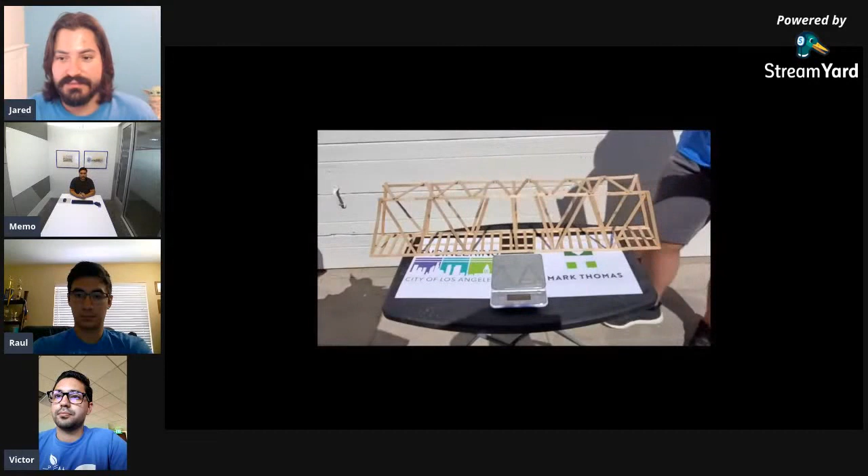Totally. Yeah, I mean, like Jared said, we're just checking that no Krazy Glue was used, that no Gorilla Glue was used, and we're checking that there's common craft wooden sticks. All the bridges are standard common craft wooden sticks.

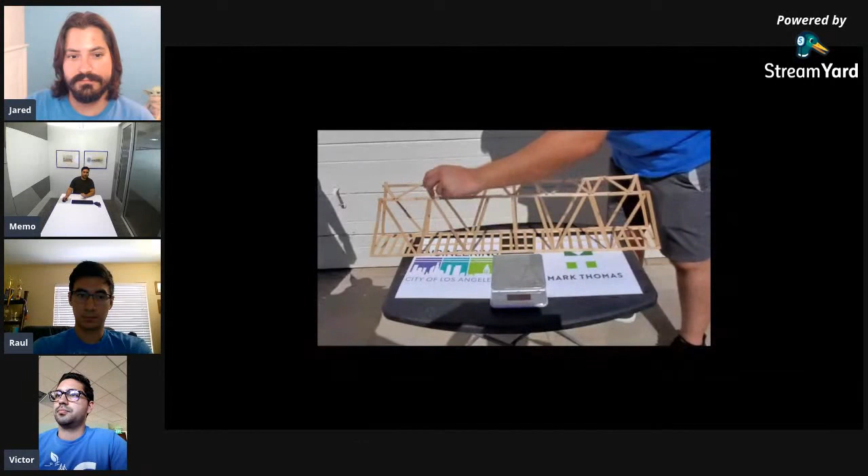Now we're going to check the 50% rule, verifying that no flat plane overlaps another flat plane of a stick by more than 50%. Bridge is in compliance. Now we're going to check that none of the popsicle sticks were altered or modified, with the exception of the roadway sticks.

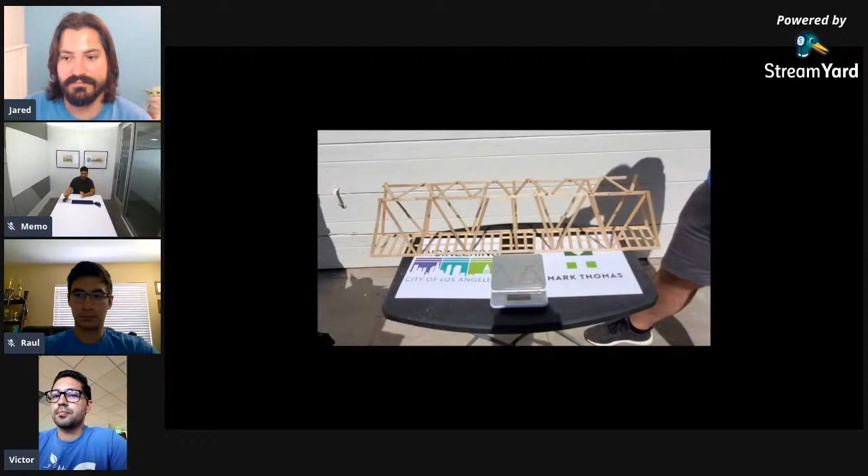And this bridge has no altered or modified sticks. Now we're going to check the bridge length. It's 37 inches. All right, got it.

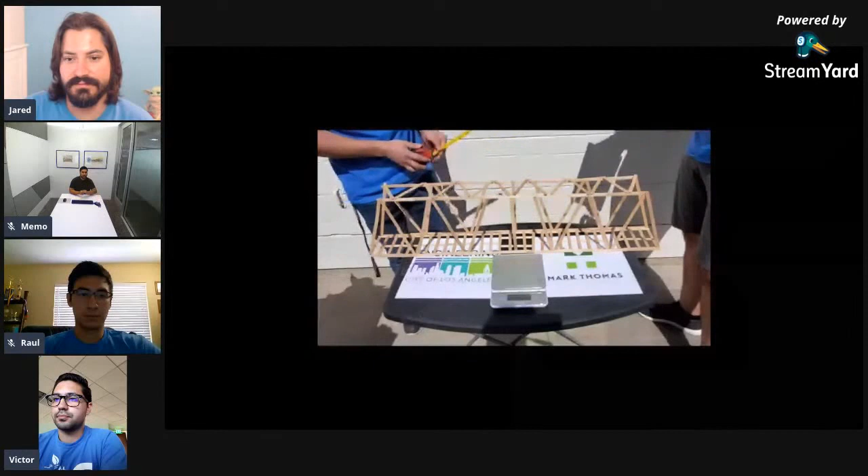Now we're checking bridge height. Why don't you turn the stick towards the camera? Can you guys read that? That is 9 inches. Now we're checking bridge width. 4 inches.

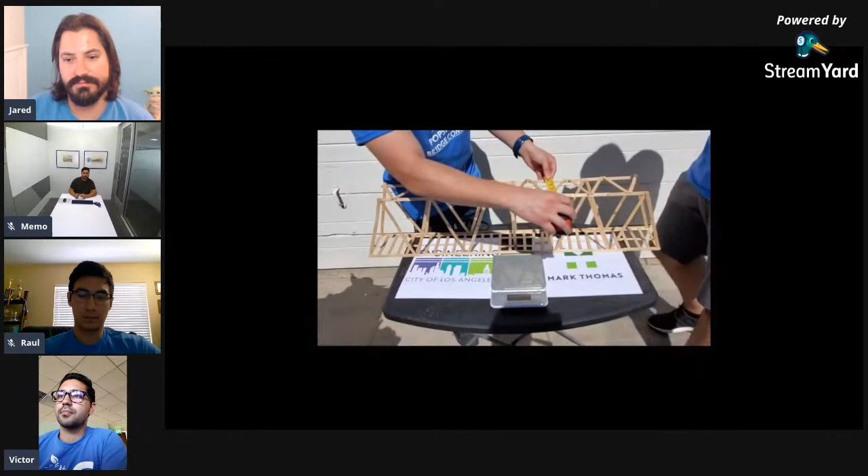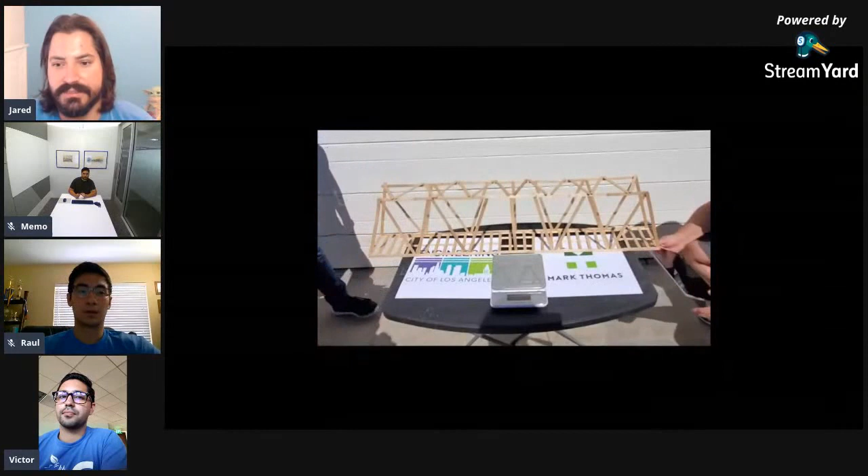Next step, to check if the roadway is continuous, flat, and level. So the bridge we're watching here, this is team prototype, right? Next, bridge number 1, the bridge roadway width is 4 inches in clearance, minimum 4 inches. Yes, what's the width? Looks like everything's in compliance so far as the dimensions.

Now the bridge roadway minimum height clearance, minimum 4 inches. Bridge is obviously more than 4 inches.

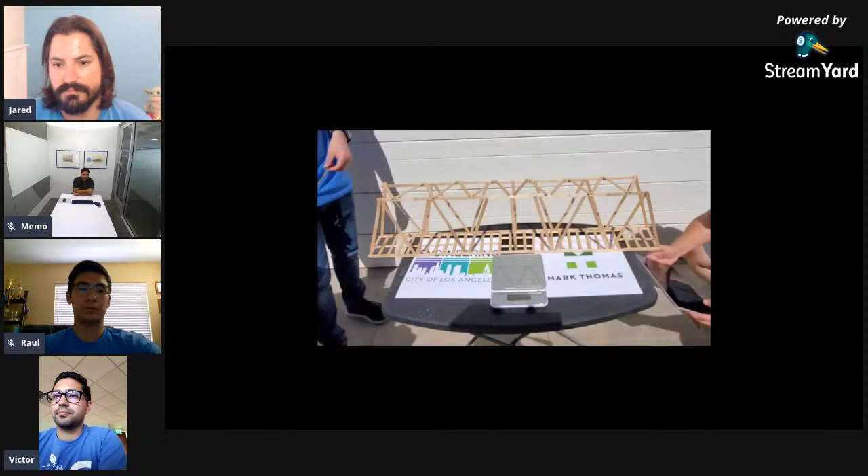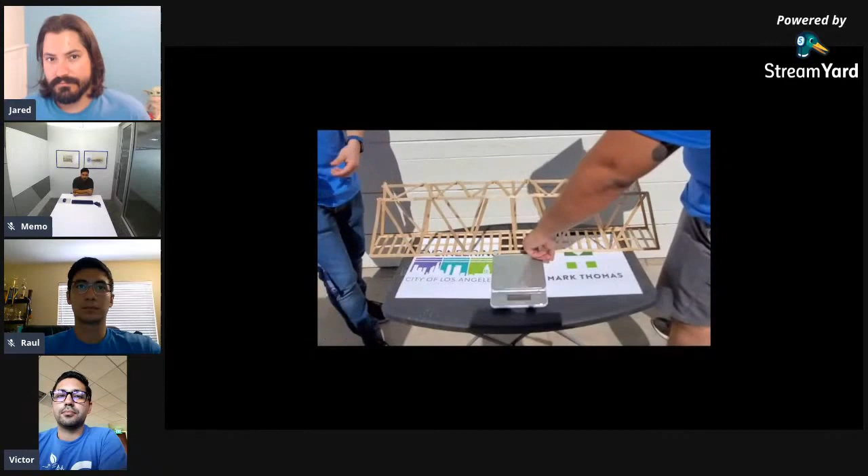Okay, now the last step is to check the roadway clearance. Check that this opening is 1.5 inches by 1.5 inches minimum. From this stick to this stick, 2 inches? Yeah, 2 inches. Okay.

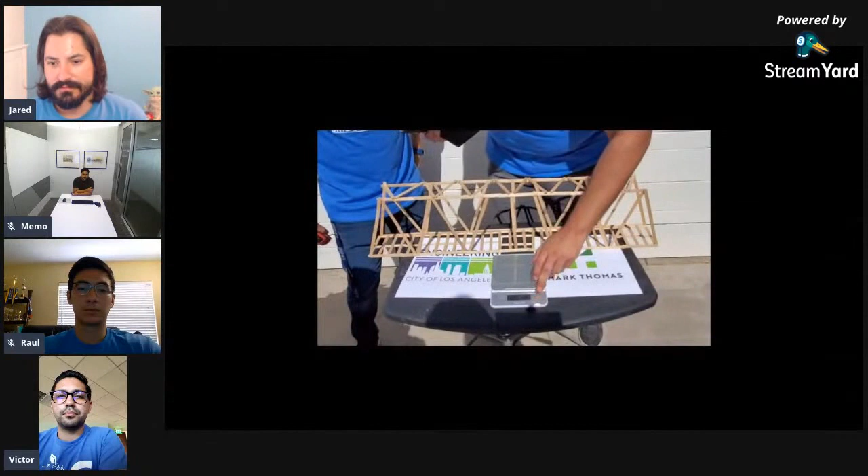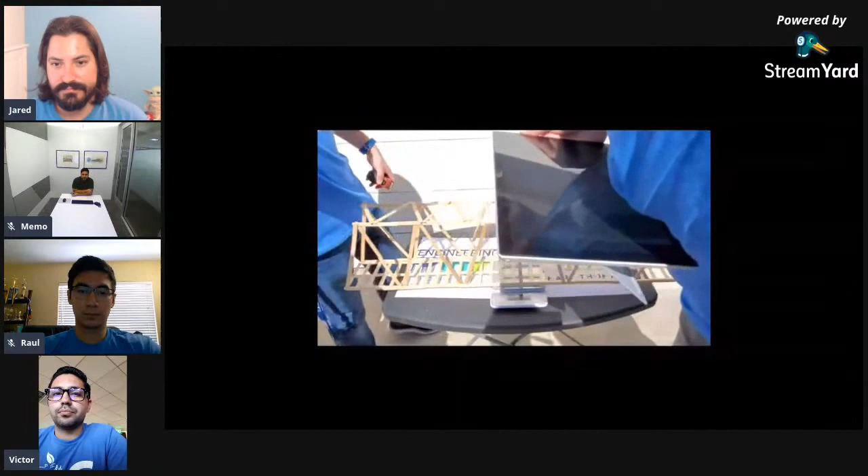Okay, and then weight. Oh, now we're weighing the bridge. Is it on? It's very hard to tell. Yeah, zero it up. Okay, we're weighing the bridges. This will be part of our efficiency calculation when we go to load the actual bridges.

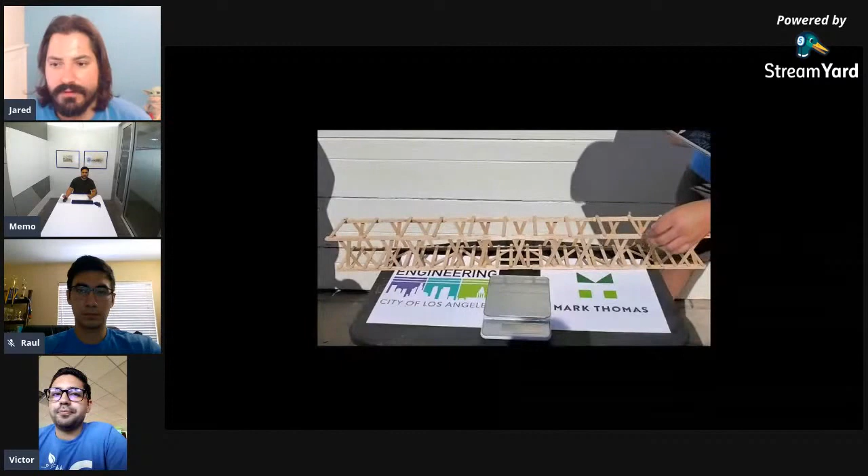This is bridge 202. First, we're going to check that the bridge is all white glue. This is the next bridge that we're testing for compliance. Team number 2, bridge is in compliance with, which I believe is glue. The next check is to verify the bridge is crafted from common wooden craft sticks. As we can see, the entire bridge is crafted from common wooden craft sticks.

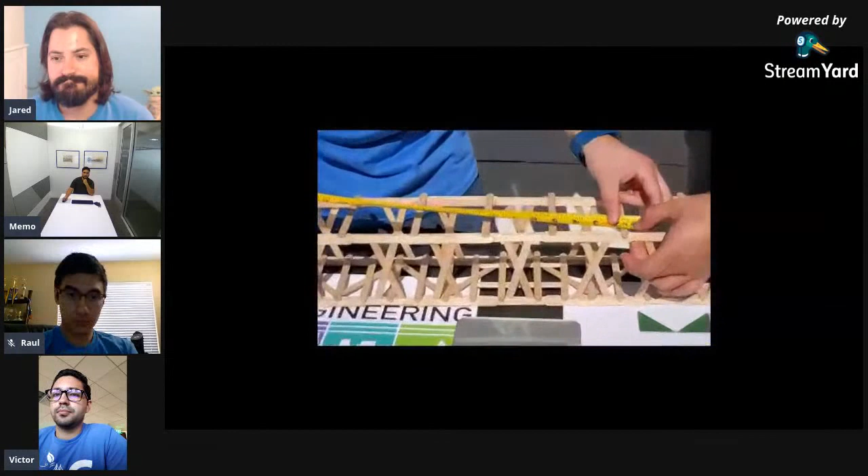Next step is to check the bridge's 50% rule. So now this is critical, this is our 50% rule. We have 1 inch of overlap, we have a quarter inch of overlap, we have another quarter inch of overlap, and we have 1 inch of overlap. But these are on different faces, so they only count towards one side of the popsicle stick. So these bridges are sharing 2.25 inches of face overlap, therefore not violating the greater than 50% rule.

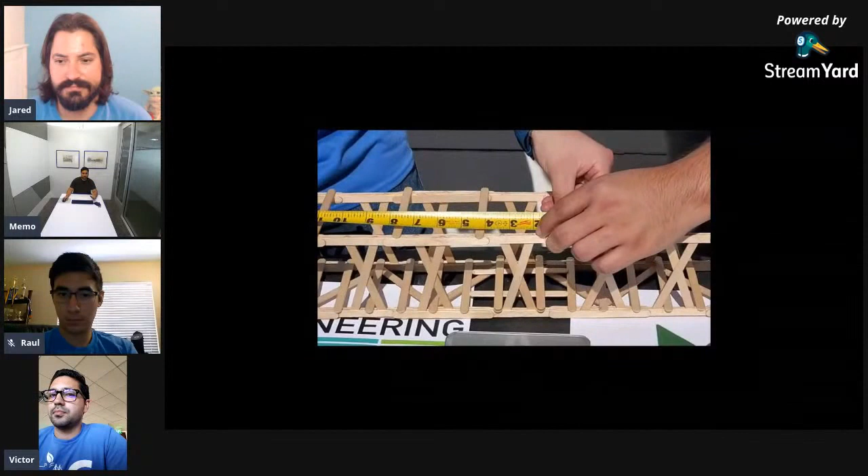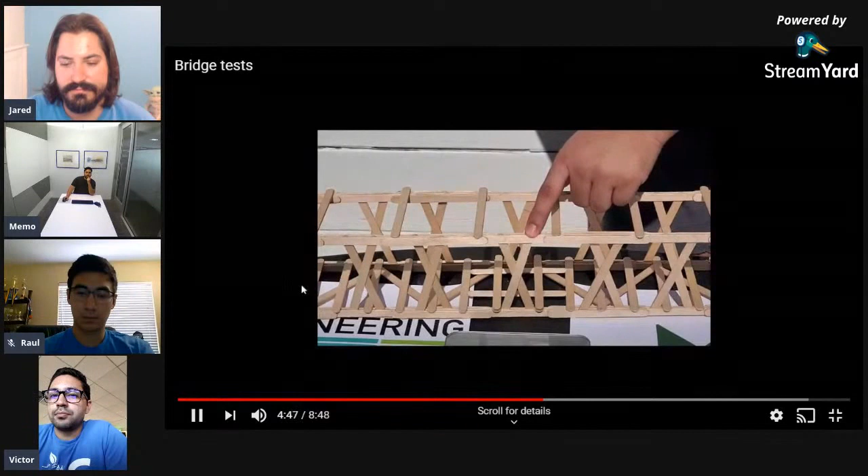Now we're shifting over to these. So there's 1 inch, there's a quarter inch, there's another quarter inch, there's an inch. So in the case of these, since it's on the same face, these bridges have 2.5 inches of face overlap. Therefore, it is in violation of the 50% rule, so the bridge will be docked for that. Okay, yeah, so I just wanted to go ahead and pause at that moment.

So you could tell that this team took a lot of time to really ensure that they didn't violate that 50% overlap rule, which is basically, let's see if I can, I've got their bridge right here, is when you have a popsicle stick, one of the faces of each popsicle stick is about 4.5 inches long.

And you can't have more than 2 1/4 of that popsicle stick covered basically by another popsicle stick. That's our 50% rule. So on the first part, the first gap where they've got those cross members on their truss, we explained that they measured it just enough so that they didn't violate that 50% rule. But then when you go to the next opening of their cross members on the truss, they have both cross members on the same horizontal face, which essentially gives you about, I think, 3/8 for each popsicle stick. And then at the ends, it's held together and held horizontal by another inch overlap on each side. So that actually puts them over the 50% rule. So it's like every other space on their truss system violates it.

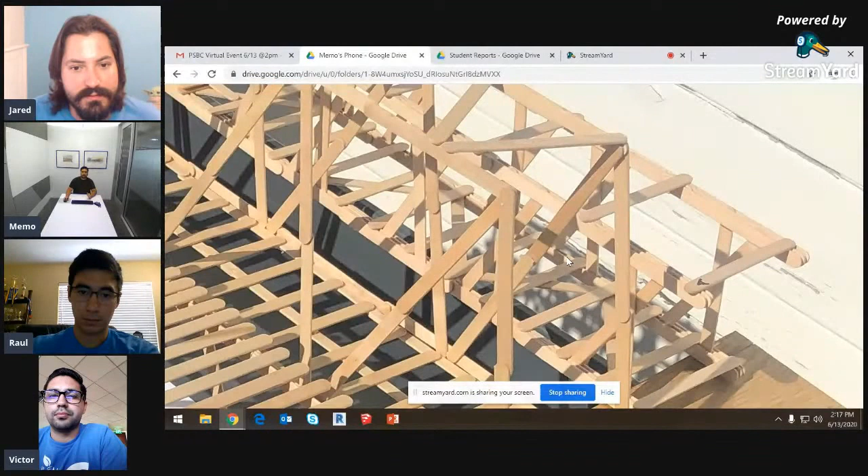Oh yeah, let me share that for you. Okay. We see your screen, Memo. Okay, so what Jared's saying is right. These segments that repeat every other segment, these are fine, right?

And one of the reasons you'll see in the loading, one of the reasons this bridge did so well is because it is so robust and so beefed up, right? It's an amazing thing what these students did. It is unfortunate about the 50% rule, right? But overall, we still did good.

So in these pieces where this bridge, this popsicle, and this popsicle are touching at the X, they're sharing different faces, right? It's on the inside of the stick and the outside of the stick. So that's fine, right? The issue is over here in this one. This, if you could see, kind of this is the most I can zoom in. Yeah, they're sandwiched in between, right?

Right. So each of these sticks is covered for more than 50% of it, right? Because the stick is 4.5 inches. We have an inch back here to connect to the next piece. We have an inch back here to connect to this piece. That's 2 inches already, right? And then it would have been fine if it was just one face of the 3/8 width. But since we have these two faces, that's what gets us over that 50% rule.

With engineering, you work really hard to push your design to the limit, right? And that's why it's so important, like in the work we do, right? We want to make sure our designs are efficient, just like how this bridge, you'll see when we load it, it's extremely efficient. And then the part that happened here, it could have been a little bit of oversight. Maybe the rule was misunderstood a little bit. Maybe we could have done a better job of explaining it.

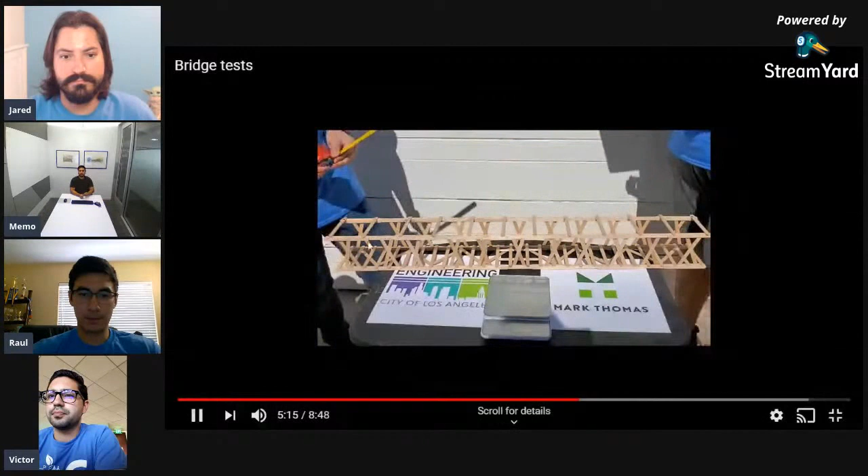Next is to check the bridge length, which must be between a minimum of 33 inches and a maximum of 43 inches. It's 38.5 inches. Next, we're checking the bridge height, which has a maximum of 12 inches. Bridge height is 4 1/4 inches.

Now we're checking bridge width, maximum of 8 inches at the top. Bridge width is 4 inches.

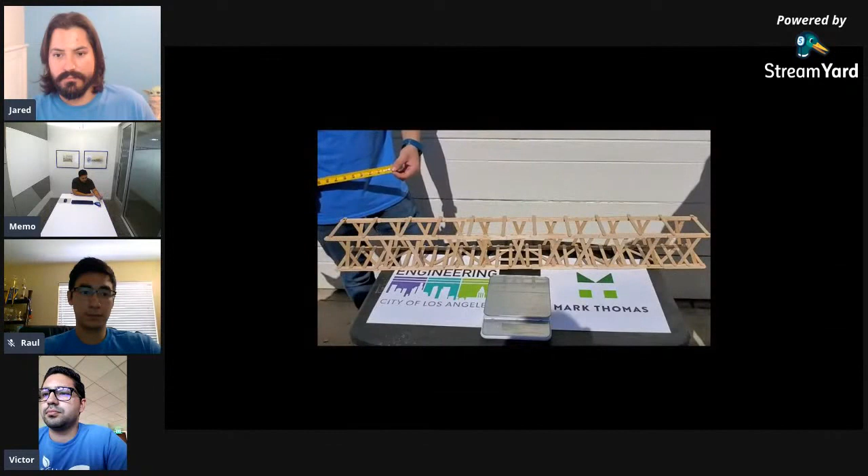Now we have to check if the road is continuous, flat, and level. In the case of this bridge, most of the deck is continuous, flat, and level. As you can see in this middle section, where we're going to do the loading, the sticks have a second layer which violates the level rule, so there will be a deduction for that violation.

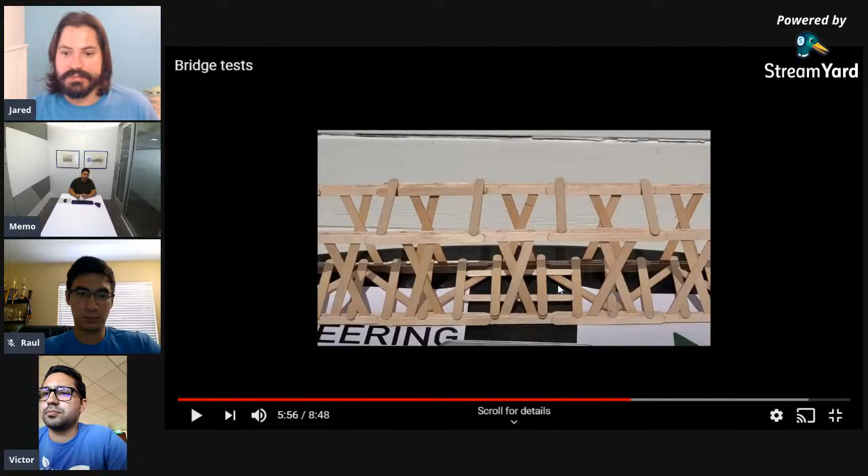So there was another minor deduction here, as Memo just pointed out, where there would need to be something flat and continuous. It looks like they've got some stacked up over the middle, which gave it not really a flat profile as you look down the bridge. So that would have been one smaller violation.

Next, we're going to check that the bridge roadway minimum width is 4 inches. Okay, they're doing the 4 inch width.

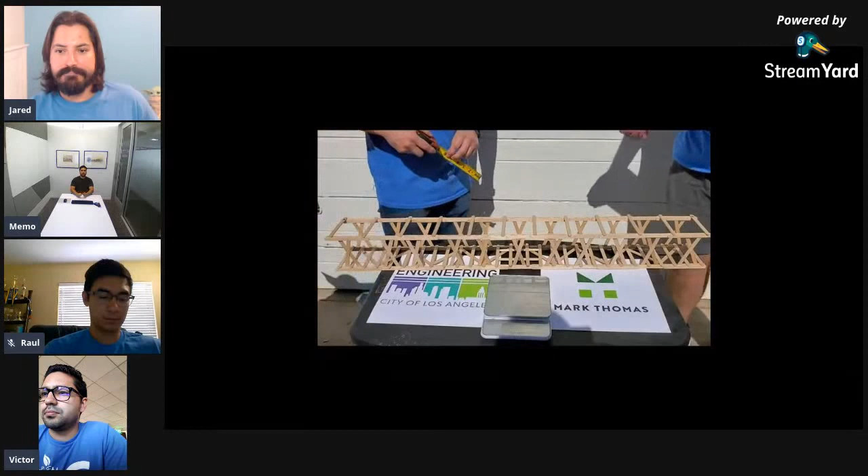Next, we're going to check the bridge minimum height clearance. Roadway height clearance is 4 inches. Now the roadway height clearance check — we're at 4 inches. Now we're going to check the clearance of the roadway opening.

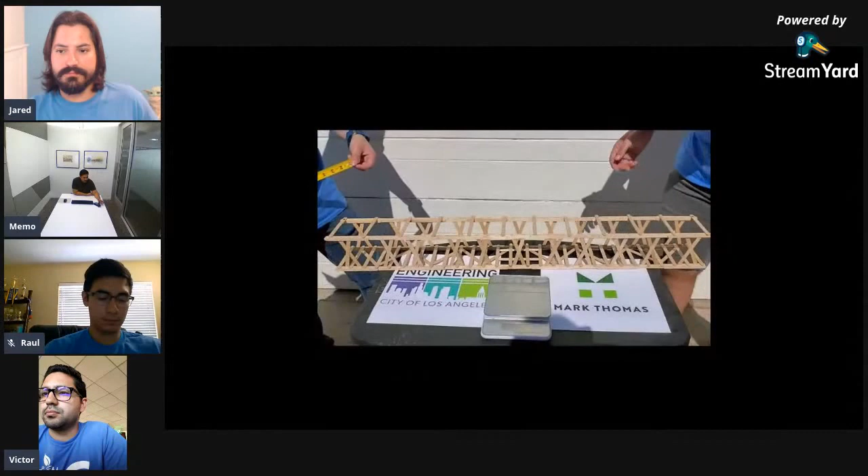It's 1.5 inches. Next is to check the bridge's weight. Looks like all the other dimensions were good to go. Bridge weight is 271 grams. That concludes the inspection of this bridge.

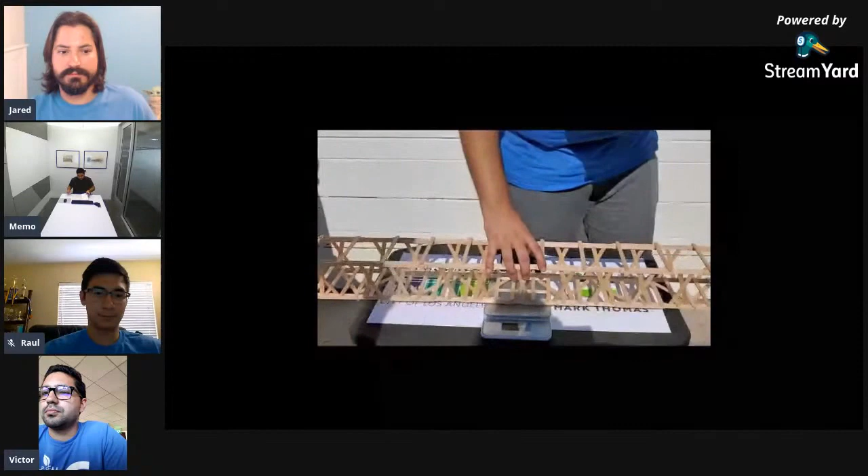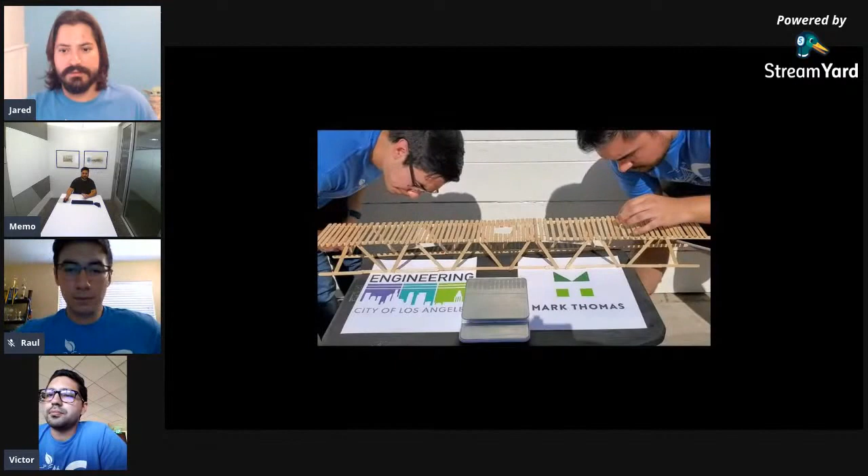Next up is bridge 203. First, we will check if the bridge is in compliance with the white all-purpose glue. Okay, this is our third bridge. We're almost to the fun part, everybody. Yeah, we're getting there — hey, bear with us. Bridge is in compliance with the white glue. This is Team Golden Gate.

Next is to check that the bridge is crafted from common wooden craft sticks. As we can see, the entire bridge is crafted from the same common wooden craft stick. Next, we're checking the bridge's 50% rule. In the case of this bridge, none of the sticks violate the 50% rule. Next is to check if none of the sticks were altered or modified, with the exception of the roadway. None of the sticks have been altered or modified.

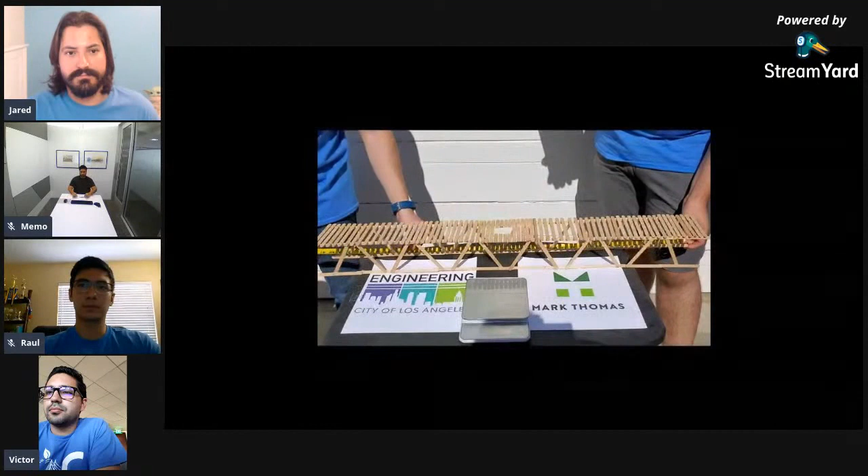Next, we can check the bridge's length, minimum of 33, maximum of 43. 40 inches — bridge length is 40 inches. Next is to check the bridge's height, maximum of 12 inches. Bridge height is 4 1/4 inches. Next is to check the bridge's width, maximum of 8 inches.

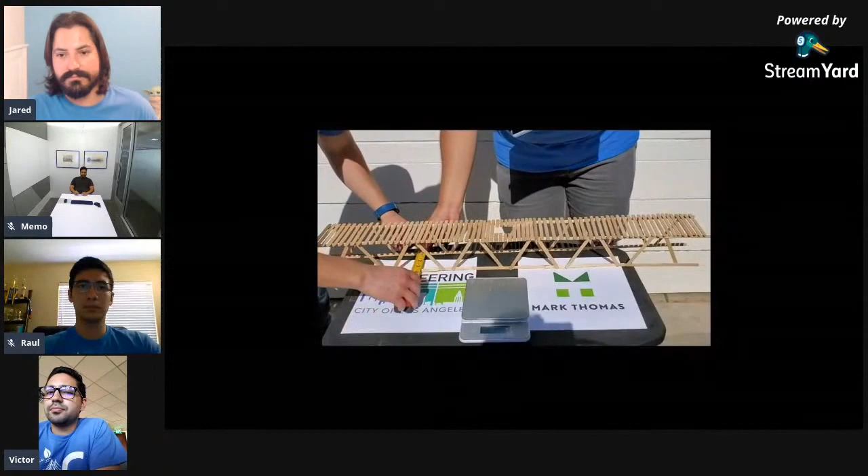Bridge width is 3¼ inches. Next is to check that the roadway is continuous, flat, and level. As we can see, continuous, flat, and level.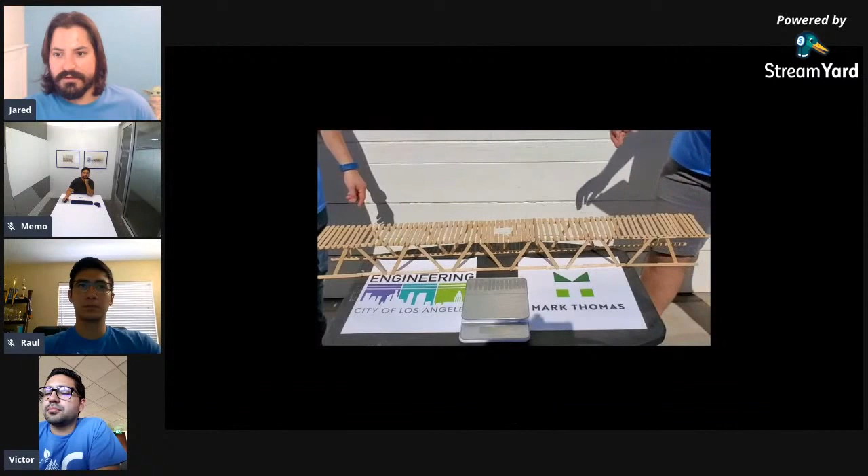Next is to check the bridge's roadway minimum width clearance of 4 inches. Looks like all the dimensions worked out. There's a level roadway, so we're fine there. And the inch and a half opening for the loading.

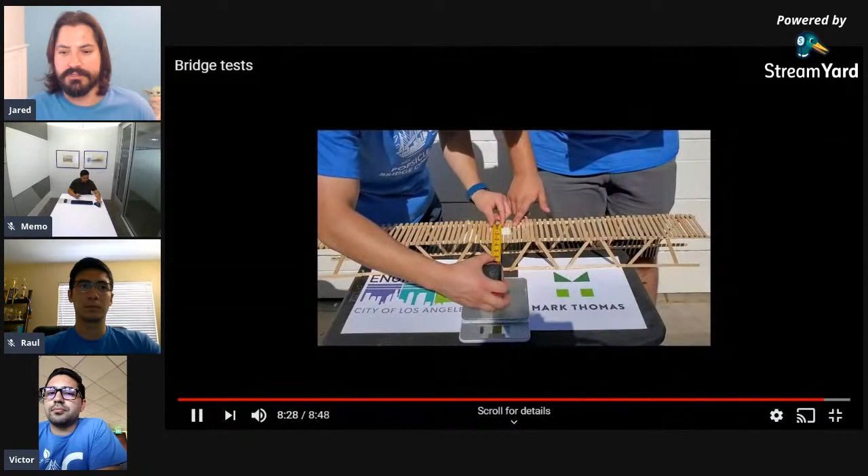Height clearance - in this case it's a deck bridge, so we don't have a height clearance, so we're fine. There's no loading height clearance since the roadway deck is on top of the bridge, on top of the structure. 1.5 by 2, so that works.

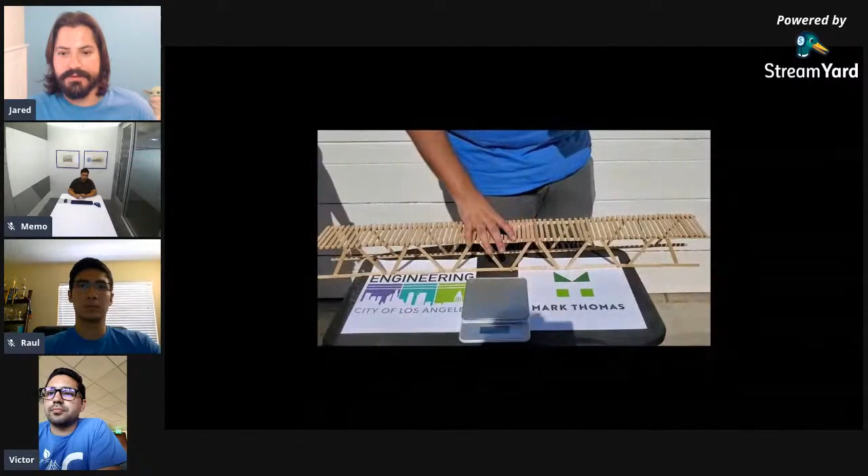Next, we're going to check the bridge's weight. Bridge weight is 171 grams.

That concludes the inspection of this bridge. Okay, great work, everybody. So we got the initial requirements out of the way. Yeah, these 3 bridges are so efficient and light that we had to go get a gram scale because our pound scale was not registering it. Good job on the efficiency of the bridge. So very efficient on your use of materials, everybody. Very, very efficient. That'll help out on that efficiency calc.

Did anyone have any questions so far? We'll keep an eye on the comment feed if anybody does. Let's go ahead and go to the actual exciting bridge breaking part of it.

Okay, everybody see that video? Yes. All right, let's go for it.

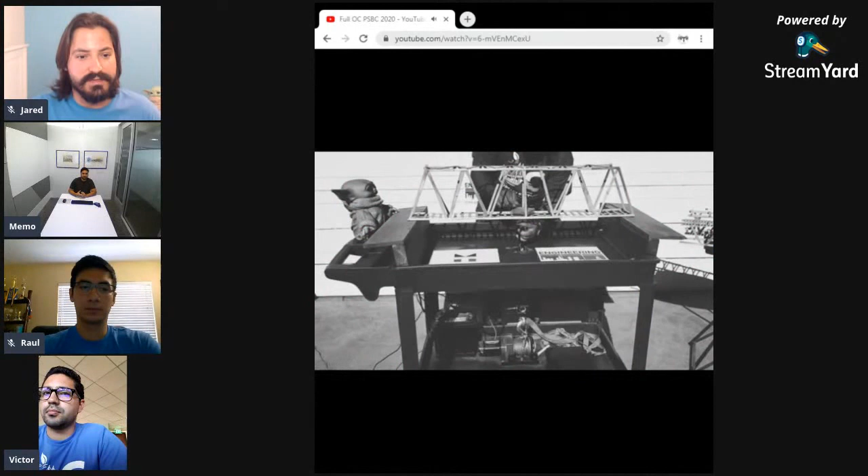So we have a force machine that we'll talk about at the end of the presentation, and Baby Yoda there was really supplemental to making the force work for this machine. So he's a cameo there that you'll see throughout.

Yeah, our force machine was pretty innovative this year. It's the first time using it.

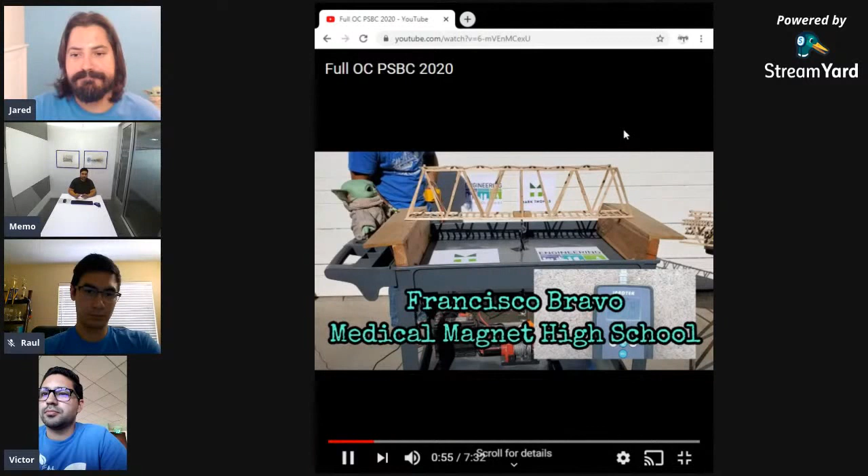All right, we've got our Francisco Bravo Medical Magnet High School. This is our first bridge. So we'll pause again - the little reader at the bottom, that's the force gauge telling us where we're at with the winch.

We use the winch at the bottom, a battery, and then the pulley system. So that winch or that force reader is going side by side with Jared and the loading device. So you'll see the numbers go up as the bridge gets loaded. The machine is smart enough to pick up the peak, right? The maximum force that was taken by the bridge before the bridge snapped, before the winch had zero force. So you'll be seeing the peak pound force reading for each of the bridges.

Yeah, good point, Memo. And that'll also help you kind of identify where its critical break was. Once it peaks out, you'll pretty much see where the entire bridge failed.

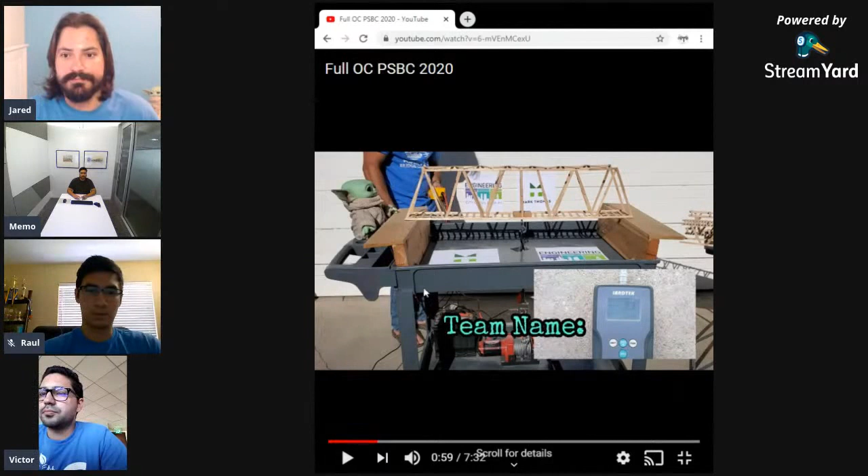Okay, so we've got the prototypes. And here's a list of their members. We got Carly, Elmer, Saray, and Simran. Sorry if I butcher any names out there. Apologize ahead of time.

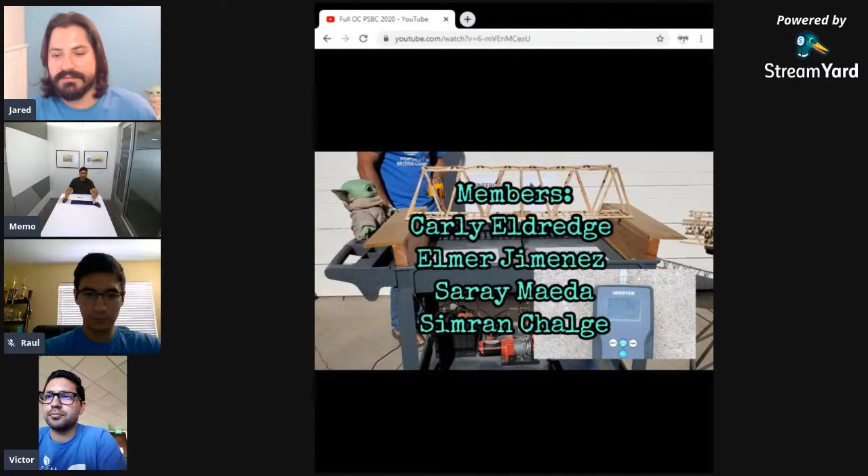And it's going to be quick. Should be reading, should be reading. Okay. And there you go. 13.9 pounds.

So for those familiar or not familiar, we'll take the weight that we grab, right? We got it in grams, we'll convert to pounds. And we're taking the efficiency and we're dividing, and we're going to get pretty much an efficiency calc. And that's essentially the entire calculation, right? It's just a quick division.

And we use pretty much, it's a scaled weight where the bridge that held that was most efficient becomes the baseline, right? So that becomes 100% of the score, and then from there on, the bridge that is less efficient will be a fraction or a scale of that weighted distribution. So that's just a little bit of the math that we used.

Awesome. All right, and so now what we're about to watch is that entire breaking process and loading process all over again, but we slowed it down. And we're just going to be able to see initially where those critical points are, where maybe something broke or let loose, or kind of that critical point and critical moment on the bridge. So let's go ahead and take a look and see what we can discover.

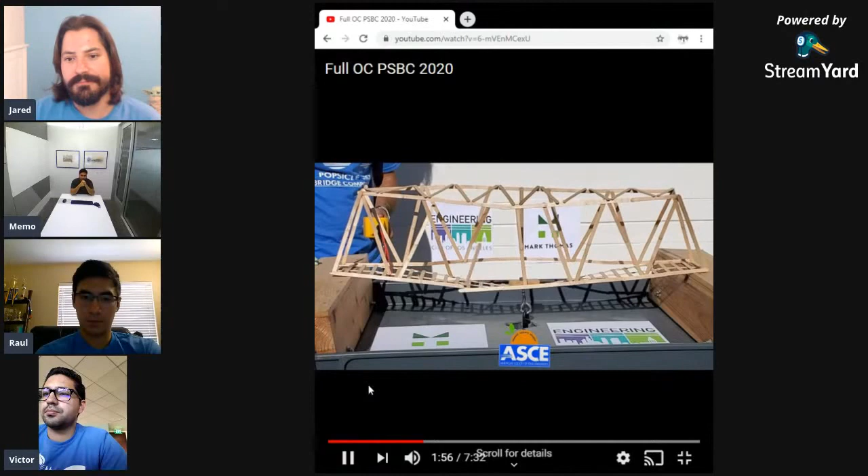All right, and right there you can see that the roadway has pretty much been exhausted on how flexible it can be. And now, since you have both of these truss systems no longer supported horizontally by this roadway, you're starting to see what looks like a twisting motion. And there goes the members.

All right, any thoughts or comments from any of the team members? Sorry about that. Or any other thoughts, guys, on this bridge?

You covered it, man. Yeah, we saw the snap like dead center at the top and in the middle, you know, it behaved the way physics tells us it's going to behave.

Yeah, I feel like this thing could have held a lot more if that separation didn't happen so early on. Yeah, something that could have been done to mitigate that is, as you can see in the center, there's just that one vertical joint which is essentially taking the whole load. The actual trusses themselves don't connect to that one vertical joint, so they don't assist as much as they could. If it was designed in a way where there were more than one member coming from that one point load. I feel like the trusses could have been engaged more efficiently, and the bridge would have ultimately held more weight.

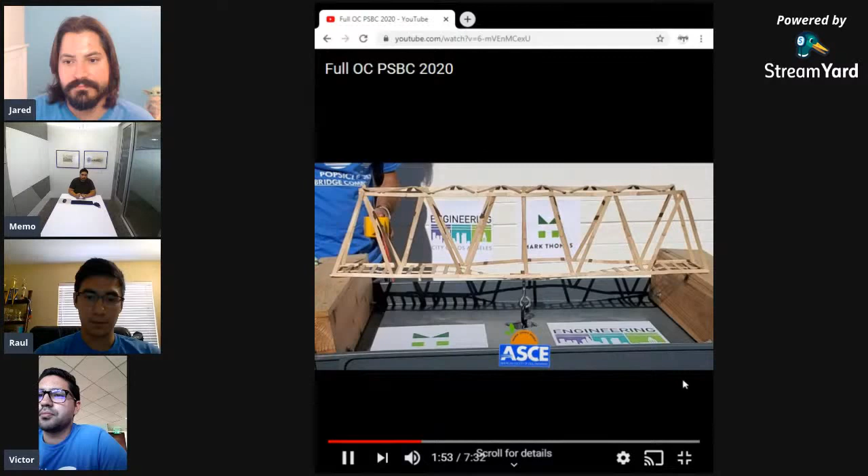That's a good point, Raul. Thanks, Raul. Okay. Great job, Team Prototype. Alrighty, moving on to the next one.

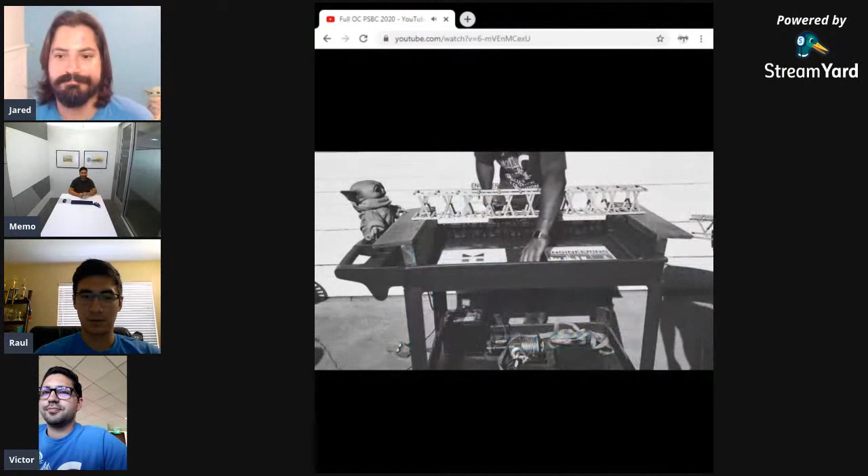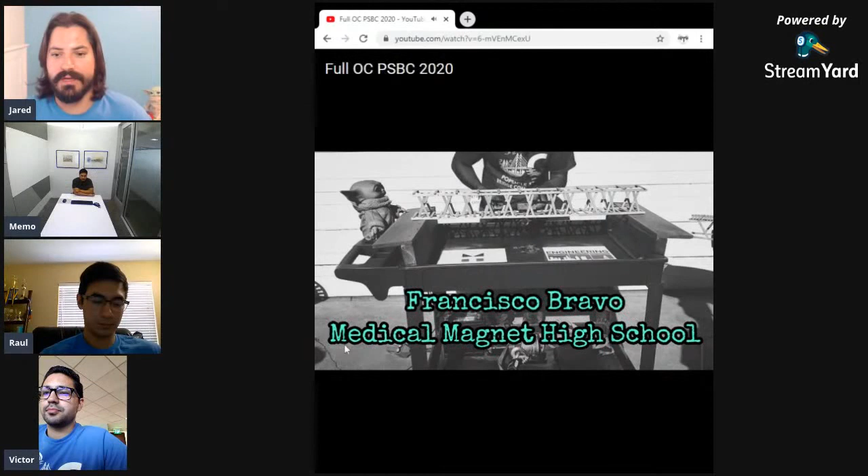Okay, we've got another Francisco Bravo Medical Magnet High School team coming up, Team Chevron. I thought this was an interesting name. And here we've got Christine, Kelly, and Michelle.

.5, 1, 1.1, 2.7, 3. Oh, we're getting that screen again. It's okay, it's okay. 7.7, 11.5, 15.1, 19.6, 26.7, 39, 45, 52.

Still going, right? It's snapping, but it hasn't broken. 75, 90. Oh man, 90 pounds, great job. 90 foot-pounds. You got to love that crackling sound of when it's just starting to fail.

That's great. Yeah, no, I mean this bridge was awesome. The stuff we were talking about earlier, it pays off here, right? You see the bridge took 90 pounds, and all the engineering that went into it. I think they did a great job, and yeah, good job.

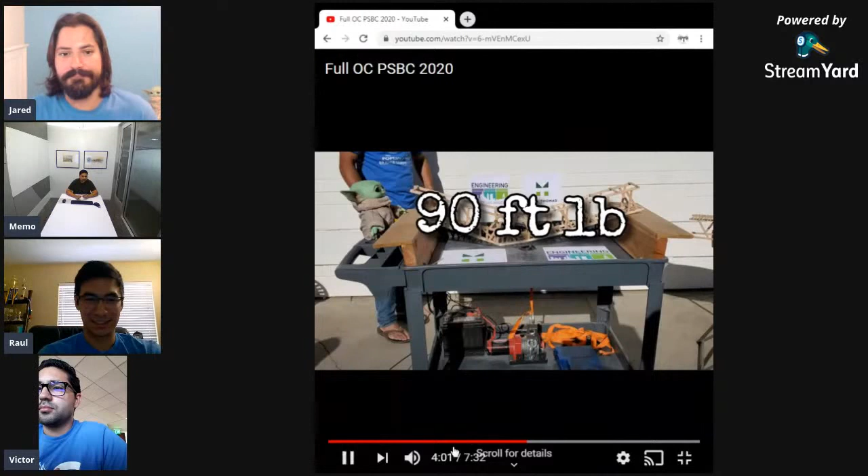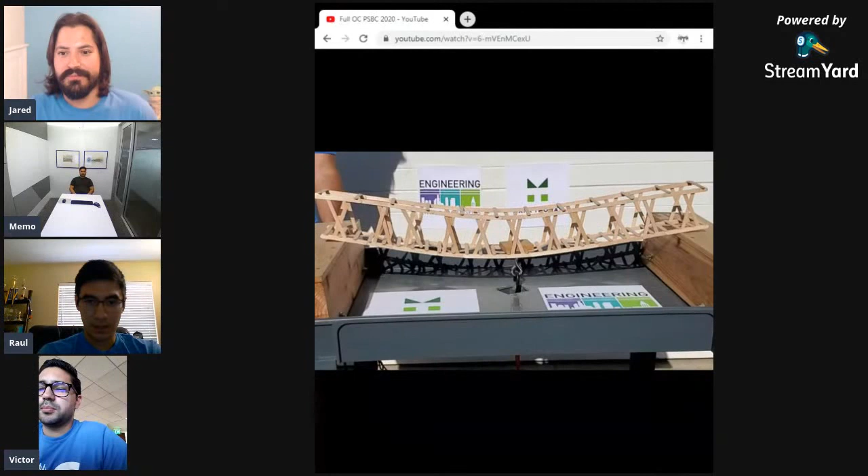Okay, slow-mo cam. It actually takes a while before it's deflecting, deforming, and twisting. But look how uniform of a fail that was. Really, it was doing these slow twists, but it just kept compensating and rocking itself back and forth until it just came straight down. One thing I noticed about the fail is it didn't happen at a joint.

It actually happened on the sticks, so that's pretty unique. You can tell by the way this bridge ultimately broke at the end that the weight was distributed across the whole span of the bridge, which was an intention that the team had. Good job on that.

One thing that was rare here is we rarely see bridges deflect this much before they snap. If you back it up just a bit there before it snapped, you'll see how much deflection we got out of it before it actually gave. Usually the connection is going to give before the deflection gives. But here we were able to get, even if you keep going, I think there was more. Yeah, like right there. That deflection right there, that just proves how awesome this bridge was.

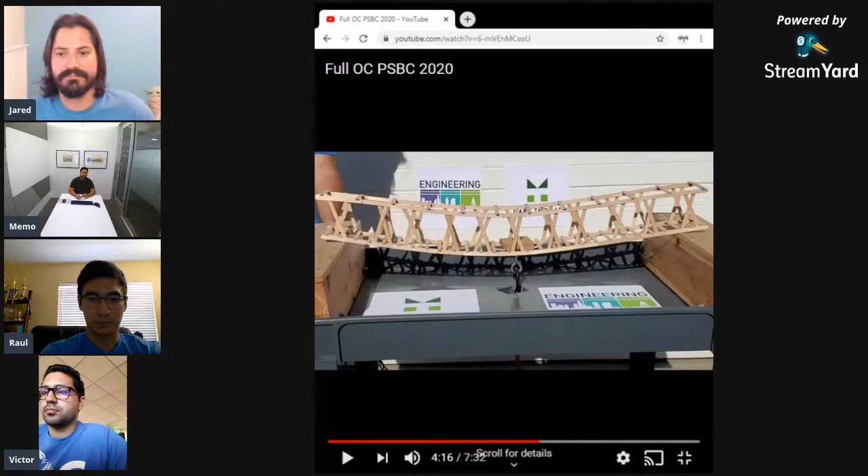Because bridges in real life aren't meant to be totally rigid. They're meant to have some ability to flex with either the heat or the load. If bridges were totally rigid, we'd have more failures. So this bridge kind of proves what you could do, the flexibility that bridges are allowed.

Of course, we knew we were loading it to the max load. But if we would have put 50 pounds, if somebody would have put a couple books on here, maybe you all tested it already, I think we read about that, this bridge would have performed just like it should have. We knew that our bridges were being loaded to the point of failure. But yeah, good job.

Great work. Let's watch this thing break one more time. Nice, there it is.

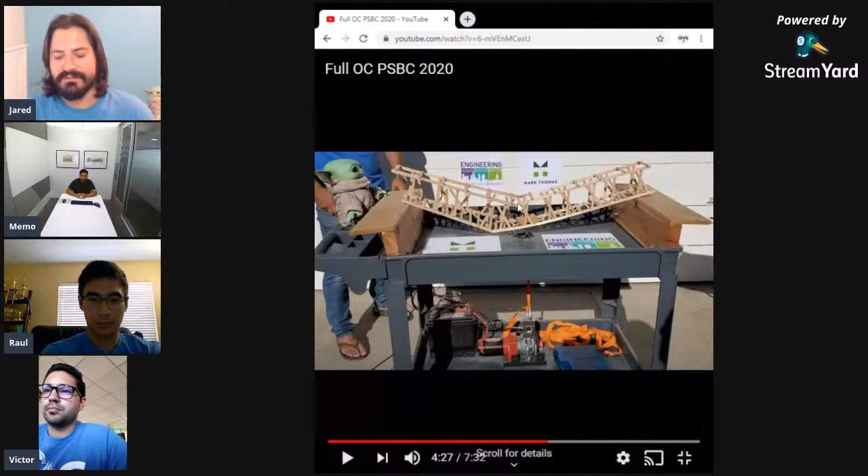You can see again how the winch is remotely being pulled down. I'm over here with an actual remote and a button that'll let me make it go up and down. And then there's a controller box you can't see back here, but it allows how much energy is going down to this winch. I have it on the lowest setting, so that's why you get that slow creaking movement. It's consistent for all the bridges so that they're all being pulled at the same rate.

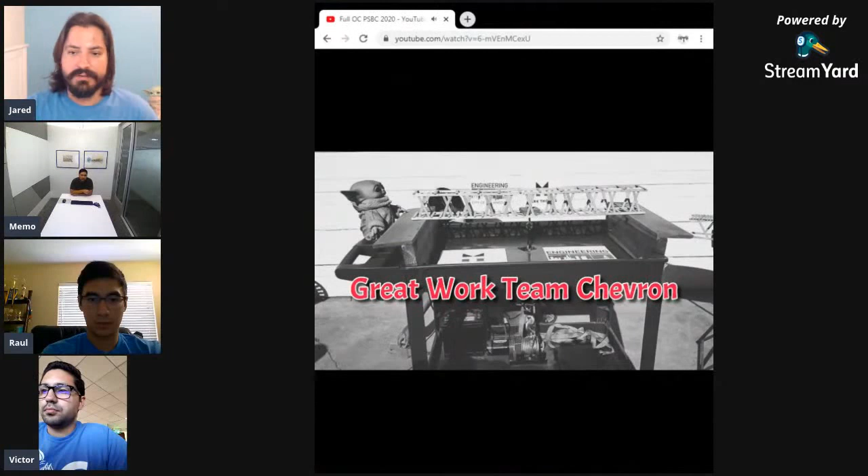We still have Yoda supervising. All right, let's do it again.

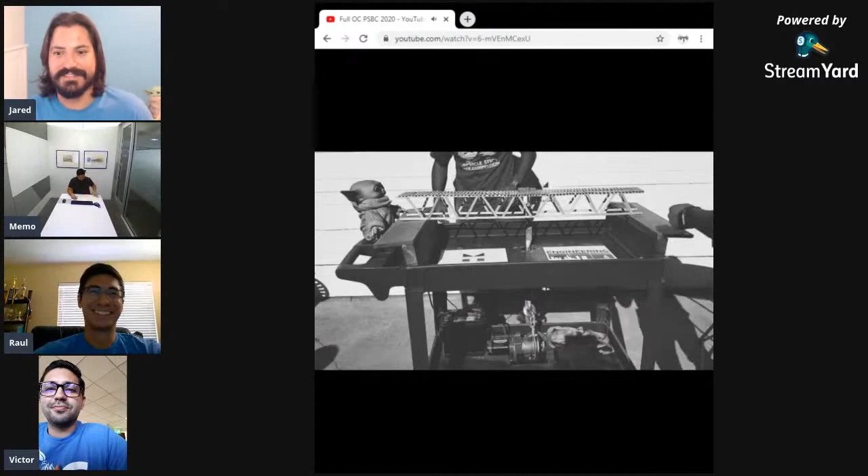Another Francisco Bravo Medical Magnet High School. Let's go Team Golden Gate.

It's a great looking bridge. It's a clean bridge, I like it. We've got Nadia, Isaac, Brenda, and Caitlin.

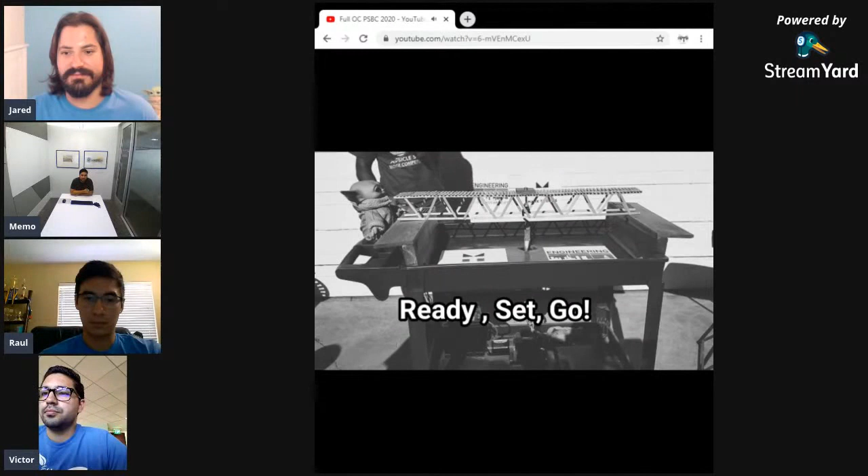Point 1, 0.2, 0.3, 0.5, 0.7, 1 pound, 2.2, 4.3, 6.7. 6.7 was a peak. All right, 6.7. That's a wrap, dude.

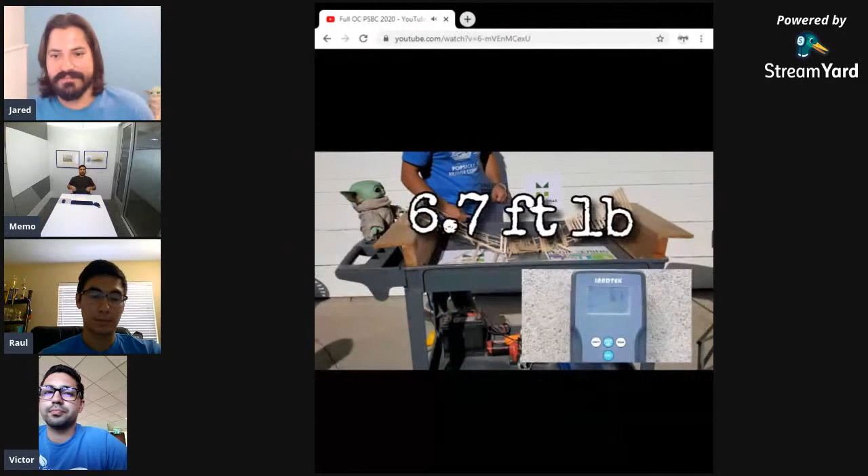So what are you guys' thoughts? The main thing that stuck out to me with this one is we had a deck bridge where I think the thing that hurt this bridge is the amount of surface area that was between the rails and the deck. We'll see in the close-ups and then some pictures later. The sticks themselves started to disconnect kind of early on, and that's the big thing. Obviously more surface area gives you stronger strength, but of course we can't...

That's what the 50% rule is, right? We can't max out our surface area because then you end up with bridges that just take too much weight. So that was kind of my main thought with this one. I liked it because it was simple and clean. It was, I think, our lightest bridge. So yeah.

Another thing on this one, which will probably be more apparent once we do the slow-mo, is this bridge failed because of the lateral aspect of it. It wasn't reinforced, so just looking down, the legs didn't have a connection on the bottom holding them together. As you can see, one of them bent inward, and as soon as that started to happen, the whole thing snapped. Just more bracing in between the two supports to keep them more rigid would have been helpful. That horizontal reinforcement as you look down the bridge.

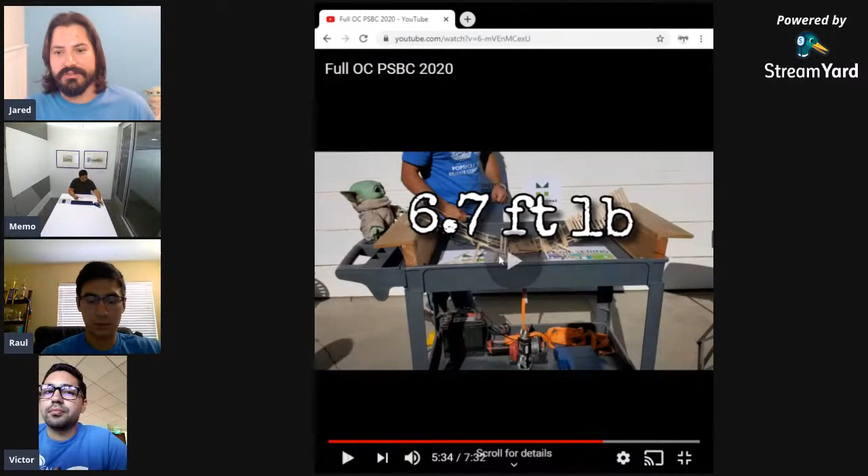One thing I thought was really cool about this bridge is that it had a very aesthetic look to it. I'll play forward a little bit so we can get back to looking at the bridge. It's just a very aesthetically pleasing looking bridge, very symmetrical, with that really neat deck on top. What bridge has that? Is that the other Bay Bridge, where it's got the double deck, but that deck's completely on top? It's really pretty, very clean looking. All right, let's watch this bridge break in slow-mo.

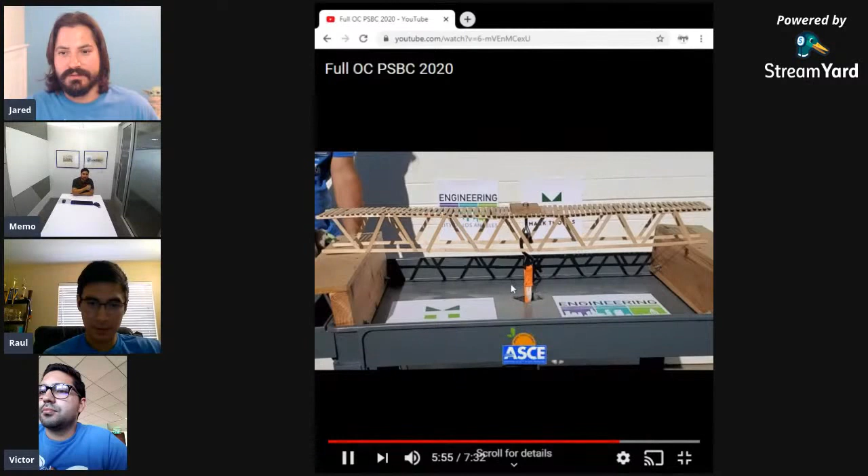Okay, so right there you see how the leg twisted in, and as soon as that happened, the whole bridge just collapsed at that point. I think this entire truss system would have to be so perfectly vertical for it to never twist in, and the weight distribution would have to be perfect in an ideal situation for it to not want to turn in or out. It's just really lacking that other support going across the bottom part of the girders as part of this truss system.

And then once that happens, you just see all utter destruction and chaos. At that point, the truss system isn't being applied, so it's just whatever strength you have in the connections going across the bridge that's basically holding the entire structure.

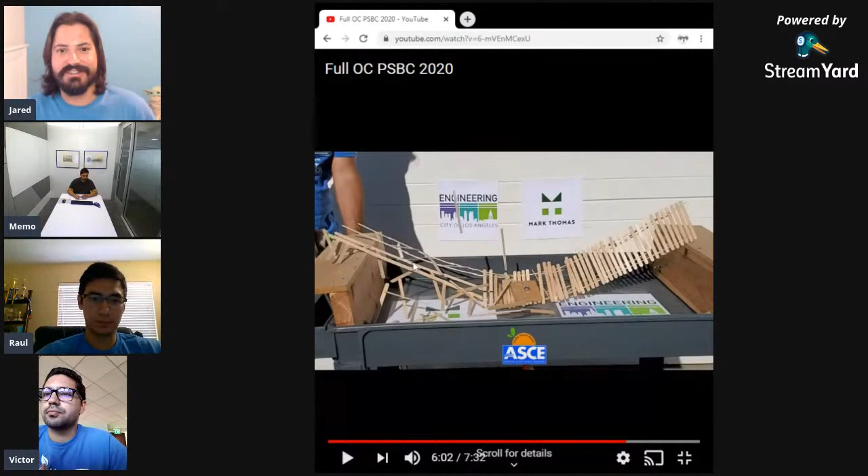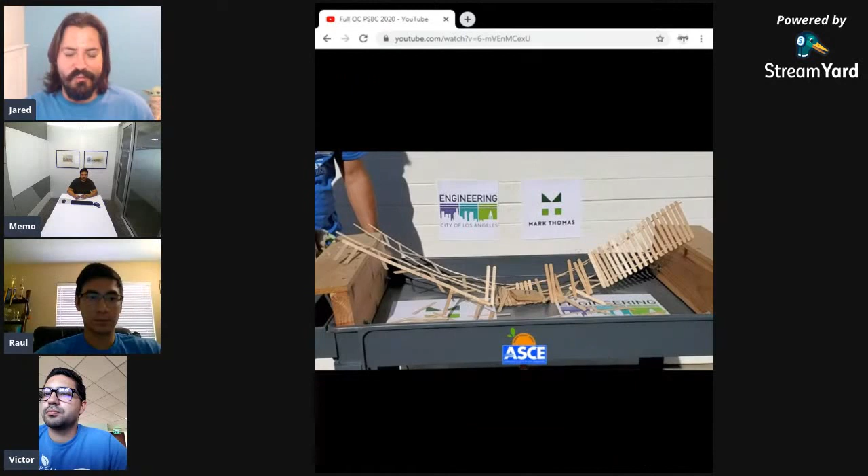So great work. You could tell a lot of design and thought went into it, and I like how everything was unique, not one bridge was alike. A lot of creativity went into this, and it's neat to see all the different types of systems being tried here. You can see they're really representative of a lot of things in real life. So great work, Team Golden Gate, good job.

Here we just wanted to feature that packaging, because that packaging in the back was our Christmas gift. Yeah, it was like an Amazon package delivered. Thank you guys for the waters and the soda, it was much appreciated.

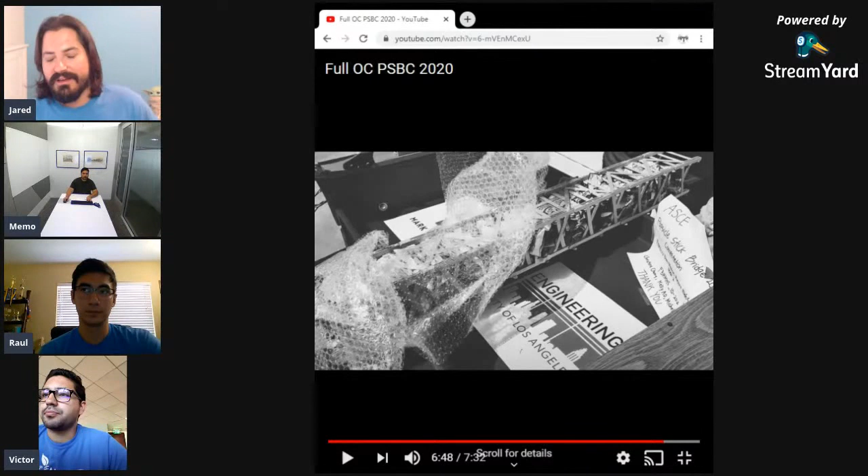I know you all had a lot of fun putting these bridges together, but you probably didn't have as much fun as we had getting to break them. Definitely a cool thing, and we're happy you were able to all virtually watch it happen. I hope this was a good experience for all of you. If you have any comments, I think next year we'll be looking to do maybe something similar or change it up a bit. This was a really good demo for this year to see how it worked out. If you have any feedback, we're completely open to it.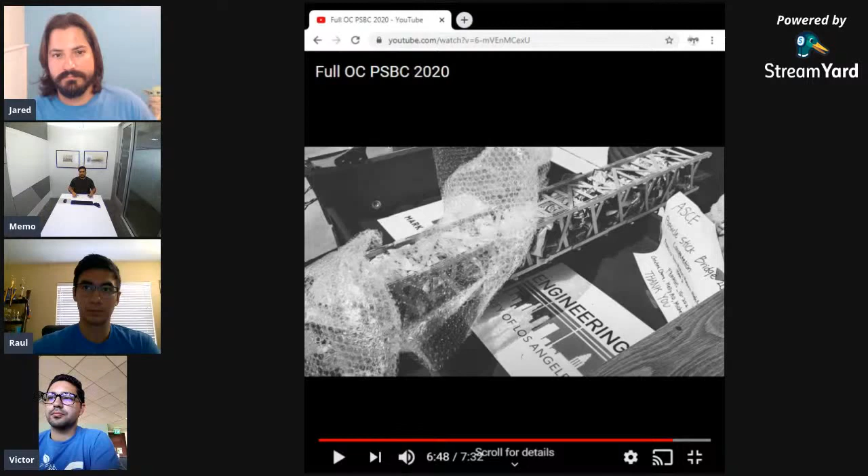Even if it's not now, you all have our email. Like Jared said, this year might be a prelude to next year. It all depends on the pandemic and what we could do with venues. But ultimately, if we can't book a venue for a large audience, it might just default to virtual again. And we understand that it's really difficult on the school end, because the advisors, who are our main advocates out there at schools, aren't necessarily with their students every day since students are remote as well. So it's a challenge, just like these past three months have been a challenge for every other aspect. PSBC is just another one of those aspects.

But again, our three teams that stuck it out this year are being rewarded for their efforts in the placement for first, second, and third, and we'll share those placements in a bit. We really appreciate the effort, and if this is the same approach for next year, hopefully it's not a deterrent to our students. We hope to keep the engagement and keep other schools involved too.

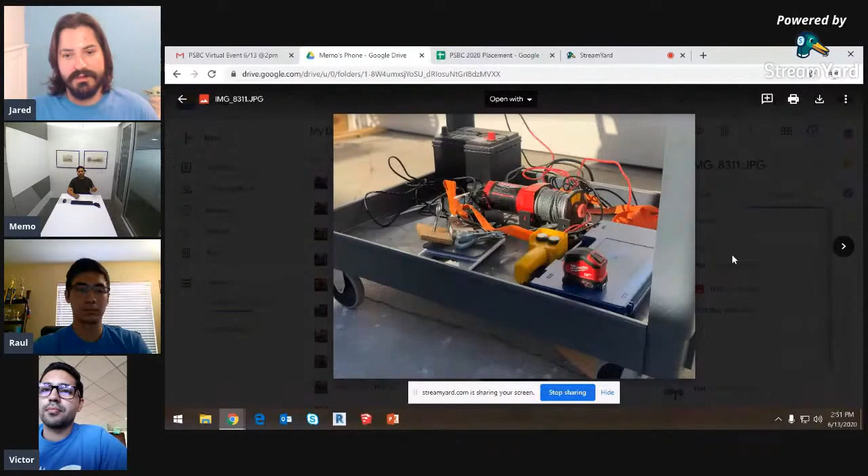All right, cool. So these are just some nice shots on the loading machine. Last year we used actual sand, and it was great, but what happened was it was a little bit of a lag while you're resetting for the next bridge. So luckily for this one, we were able to...

Oh, are we still there? Yeah, we're still there. To use this new mechanism. We built this in 2019, and just right at the beginning of PSBC, we wanted to do something a little different.

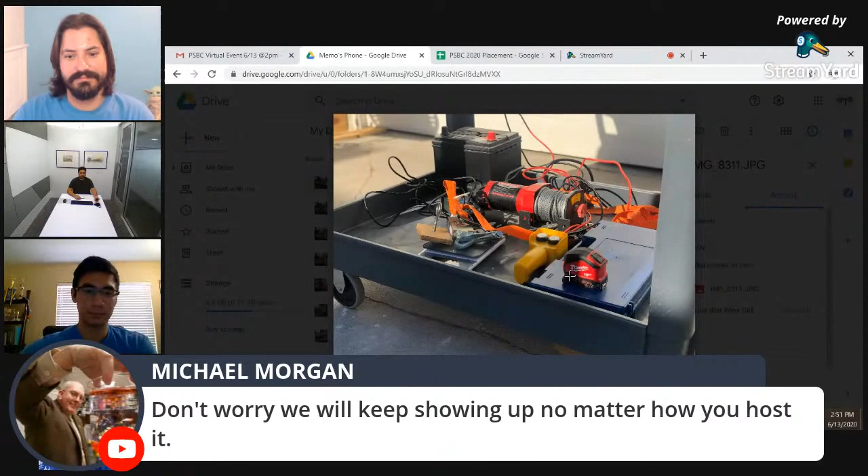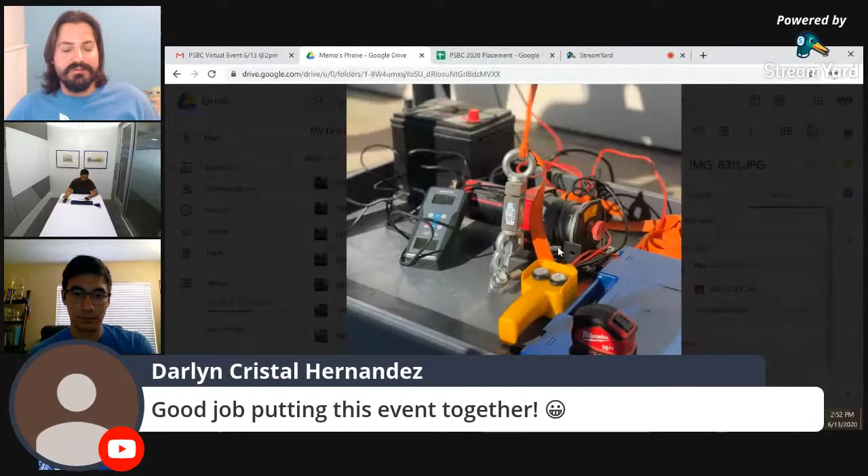Yeah, so I'll share a couple pics. Awesome, so that's our winch system, and there's a sensor right in between that's like a force sensor that tells you exactly, to a very precise measurement, how much force is being applied to your bridges. We thought it was kind of a safe way to do it, where you can separate yourself from the machine. Instead of having to pick up some odd 50 pounds at a time, loads of sand, and stand there steadily pouring it into a bucket - I experienced that years before, and it's one way to do it, and it definitely works - but this one, we kind of got creative with it and tried to create a system that can be used for years to come, and is going to be safe and a little bit more efficient. It's all about efficiency, right?

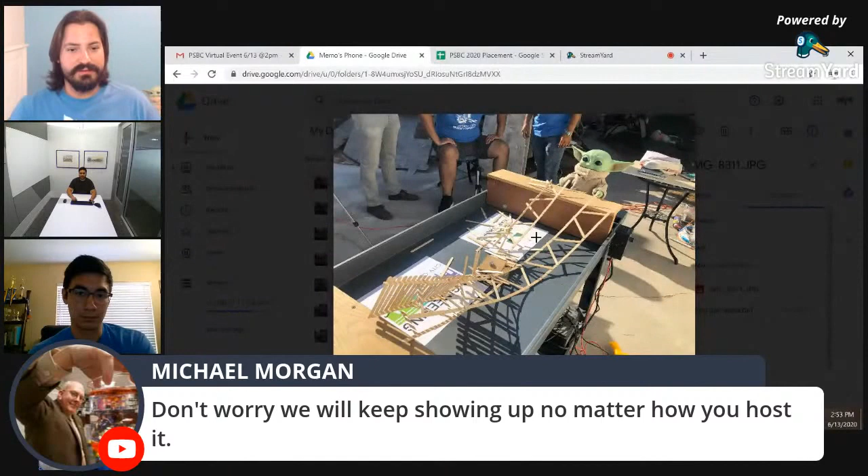She did a rush order for us, and her schedule changed too with the pandemic, but she was able to get us our shirts. Like we said, we have shirts for all of our participants, our advisors, our volunteers, the people that supported us the whole year through. We have shirts for everybody, so we did account for all of that.

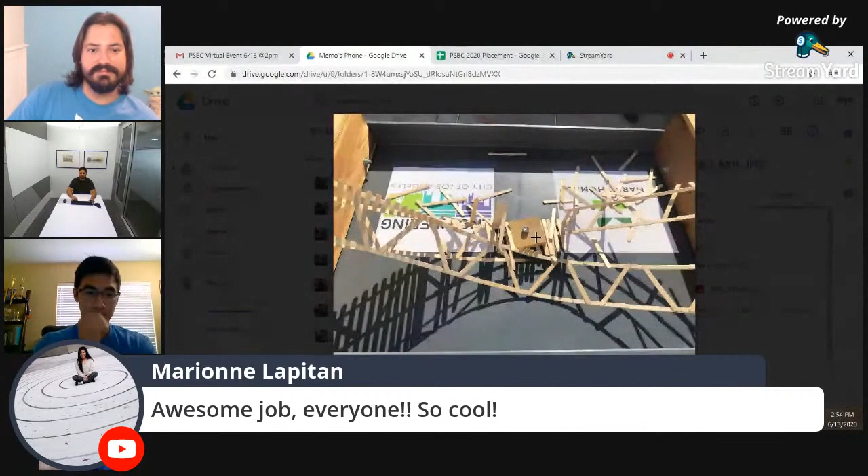What about the logo? Who put that logo together? Judy. Oh, that was Judy Beck. She's involved in YMF and helped out with designing this great OC logo that you see here. Great job, thanks again. I want to make sure we recognize all the awesome volunteers that help make this happen, and everyone's continued support. So if there's nothing else, I think we can wrap up this year's PSBC.

We need to also thank Tulip. That was Tulip back there, supervising the whole day, making sure we did everything safely. Let's see... she's so sweet, it's our Pekingese princess.

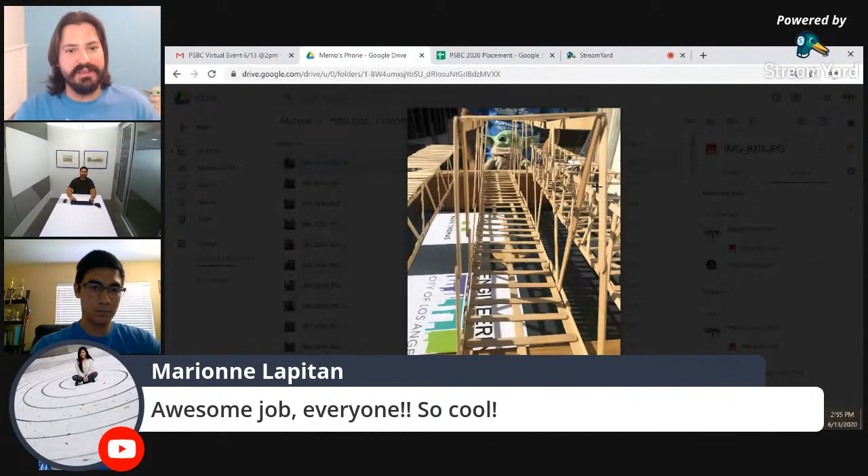If you want any of these photos, just reach out to us and we can give you a ton of awesome broken bridge photos. Maybe we'll just create a drive with photos from before they broke. Tons of photos for everyone to flip through. We'll have to give these to our media people to spam out there.

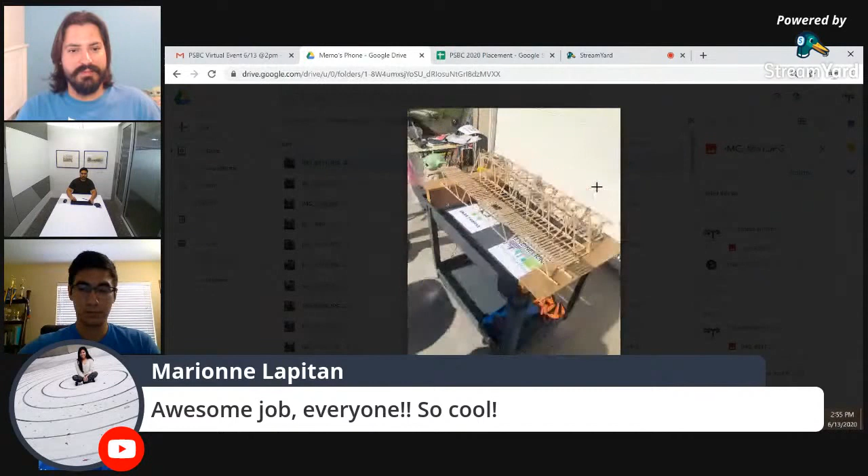I hope everyone liked the added touch of Baby Yoda. There's a lot of force happening, so we figured we might as well let Yoda show you where the force is coming from. Yeah, that's the last picture.

Then lastly, our placements, zoomed in here. Coincidentally, our team naming is the way we took gold. So Team 1 got first, Team 2 placed second, and Team 3 placed third. So yeah, good job to our teams.

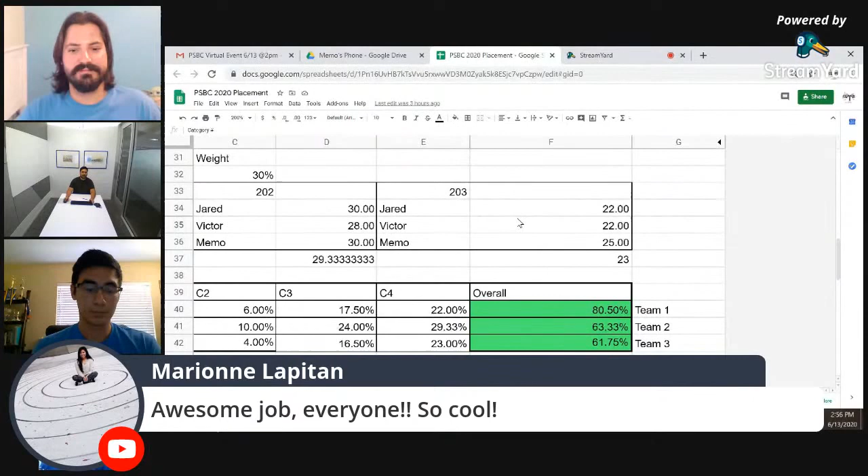This year, of course, it was a different format, so we had our 3 teams. You guys stuck it out, you guys all getting rewarded. We'll talk to Michael and work out how we're getting those checks to you in the next couple days, and your T-shirts as well, so that's yet to come. We had a lot of fun and it was a different experience because of everything, but it was really rewarding, and we had a blast doing it the whole way through.

So Team 1, that's the Prototypes, right? Great job, Prototypes. And then Team 2, Chevron. Great job, Chevron. And Team 3 is Team Golden Gate. Great job, and shout out to all the teams out there. Good work. Yep, and I think that sums it up.